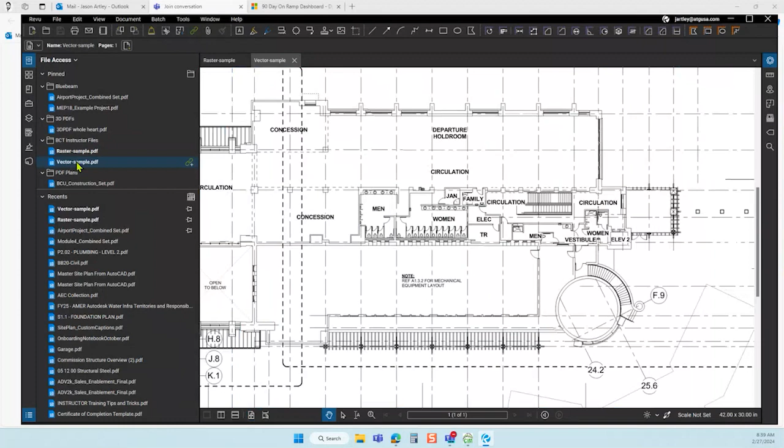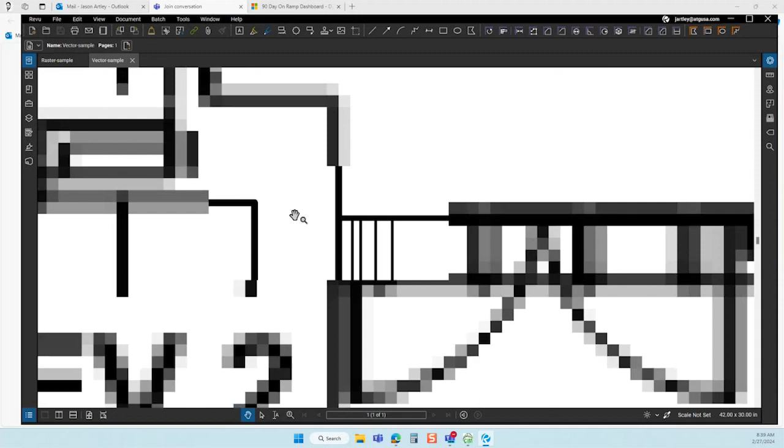When we're talking about PDFs, we're always going to be talking about raster versus vector. This is a vector one. It came from a CAD program or Word, generated from a computer. So this is what we're talking about when we say agnostic, as long as it came from a computer with no scanner involved. As I zoom in, the lines are crisp. They get a little funky zooming in and out, but otherwise I can still measure, I can select things, I can be more accurate. The line work and the text look really good.

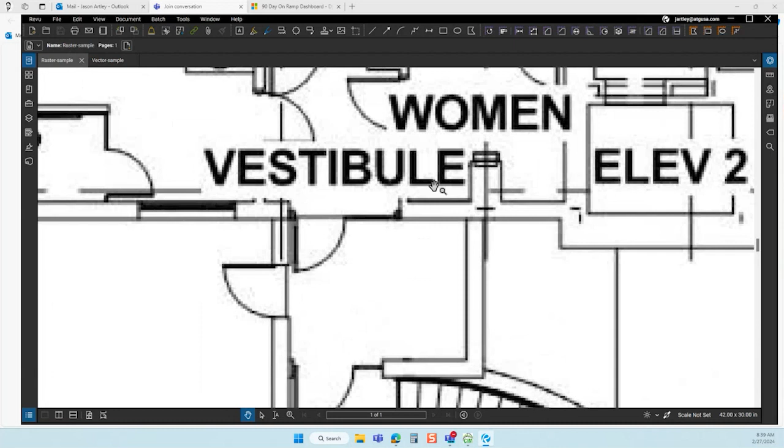Now in a raster sample, this is what we see a lot of still, where we've got those full-size pages that were printed out on paper and then run through the scanner. So it's the same file, but this is what's going to happen: you zoom in, and the letter just gets more pixelated and gross because you can only do so much. Even if you scan it at the highest setting, you're still going to have these digital remnants. A lot of folks have moved on from these, but David, you said you're still working with rasters quite a bit.

Yeah, some of the designers seem to, I guess, not trust us. Either that, or it's just the way they do their files. They will scan something or plot something and then scan it. The challenge with that is there's nothing there, no content for us to work with, and that can be very frustrating.

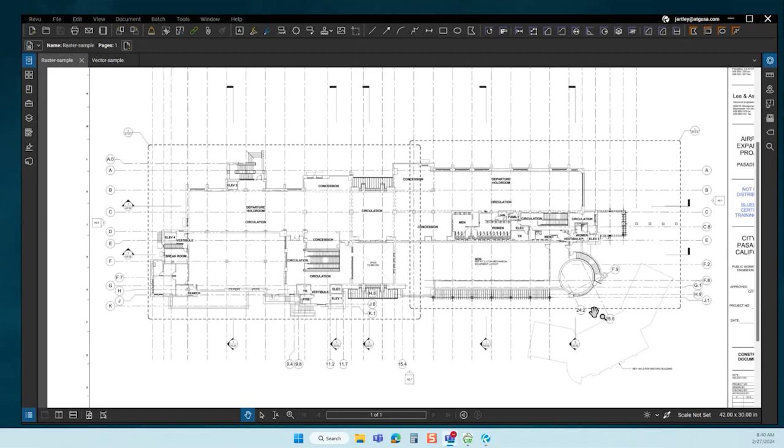Absolutely. Ray put in the chat, flashback to AutoCAD raster design, and it gives you the heebie-jeebies if anybody's played with that. Yeah, so you can still do stuff with these raster files, but let's talk about how we got here.

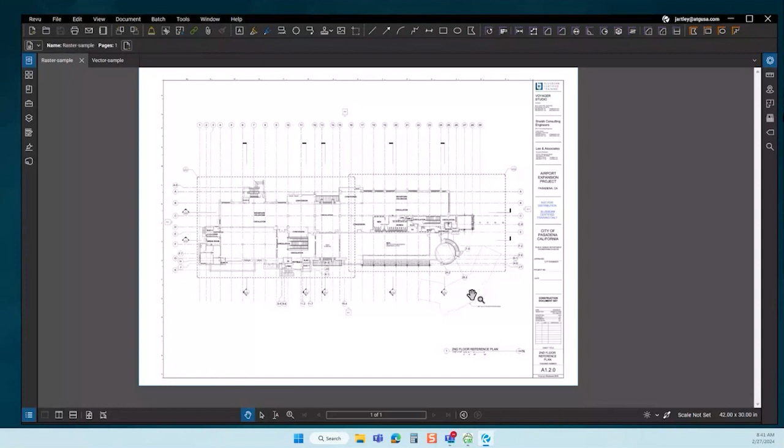This is assuming that you came from paper. So what does that mean? You printed it, probably had an engineer or architect sign it, and then they scan it, that way they lock it, as David said. They're trying to protect that information versus a PDF, because in a PDF we can sort of go and wreak havoc however we like with these tools. If I wanted to go in and remove something, I have that capability to take that out, or make a change to it.

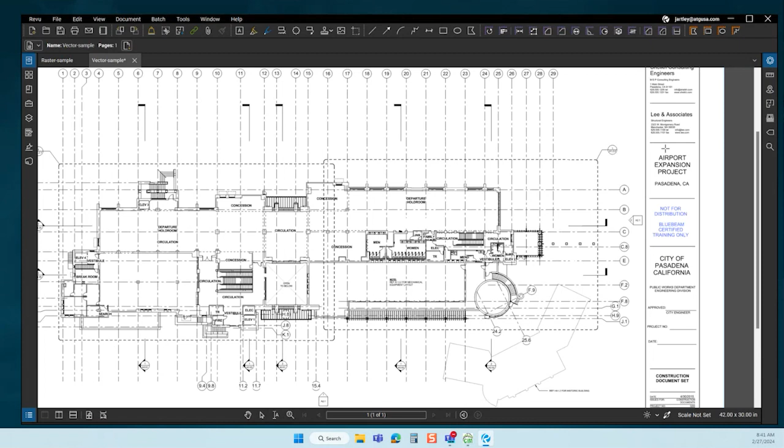This one wasn't signed, we'll talk about that too. If it was signed, sometimes you can't do that, and sometimes you can, depending on your settings. Michael and I had an episode a month ago or so on digital signatures versus digital certification, so go check that one out to see what changes were allowed and not allowed.

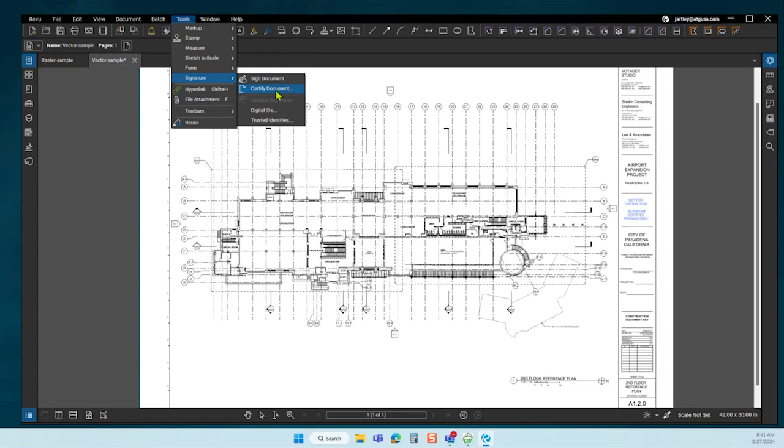Overall, and this is probably a question for everybody in the chat, how often do you still deal with paper and scanned raster PDFs?

Yeah Doug, what is this, 2010? You'd be surprised.

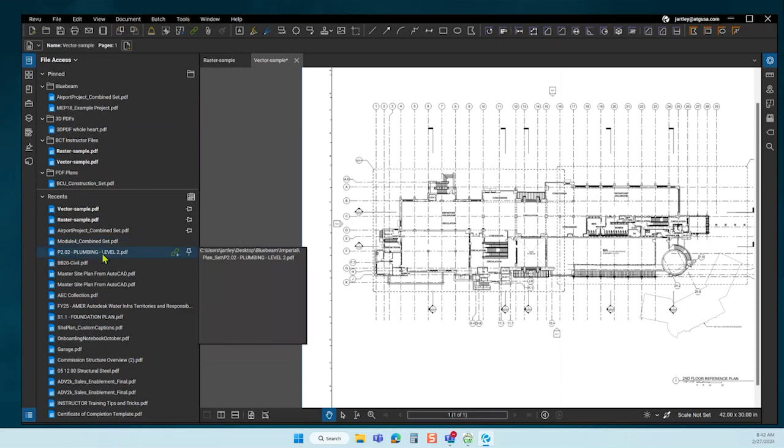I understand people's concerns about proprietary information and people changing things. At the same time, you're putting all this effort into producing a digital document, and you're basically making a photocopy of it on a really bad machine. You take all that functionality out of it, makes it not useless, but you're taking something that is a beautiful work of art with your line work and turning it into just a smear on a piece of electronic paper. In some cases, even old blueprints look better, you know? Exactly.

So yesterday when I was starting to dig through some files looking for an example to show, I found this one. I don't remember where I got it, I'm guessing it came from an old client file, so I erased the title block. But this is an old vector PDF, and what I thought was interesting about it was it's not half bad.

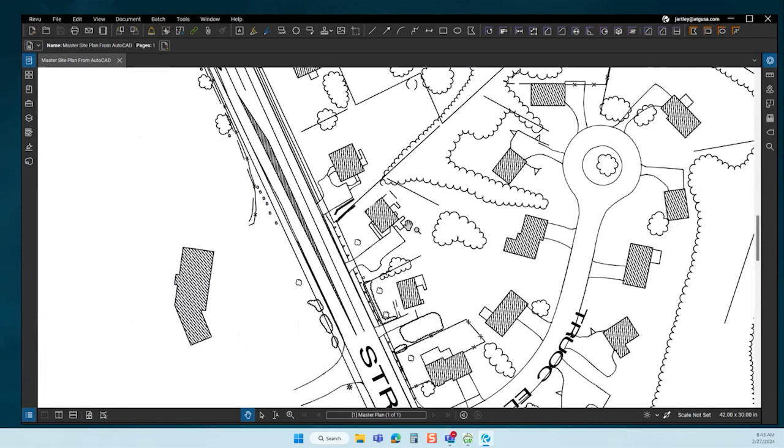I mean, obviously, that font is a sin, so we know it came from AutoCAD. But also, it came from 2004. So this file just had its 20th birthday, and it's still usable, right?

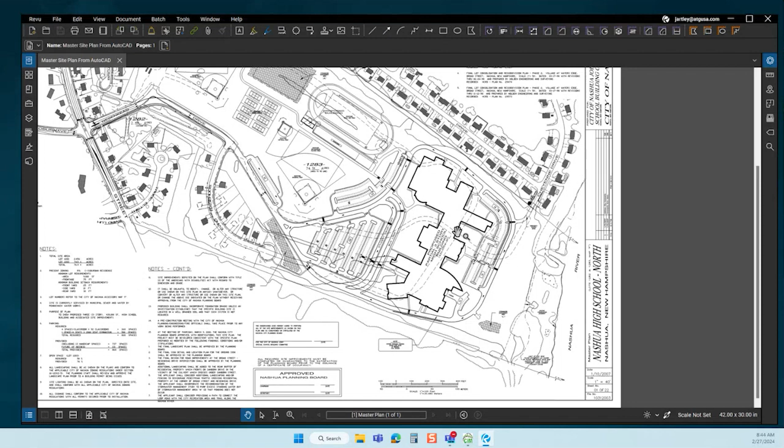So this is where this conversation came from. How are we going to make sure that the files we're producing today are still worthwhile 20 years from now, because there are as-builts, there are things we're going to have to go find. We're going to have a bigger digital repository of stuff on all these projects. We're not limited by file cabinet size or flat file size, we can store everything anywhere. So how do we make sure those files are worthwhile?

What I thought was interesting about this particular one, again, for being a 20-year-old PDF, is that it has drawing layers in it. These came over from AutoCAD, not a very good CAD standard in my opinion. There's a sports layer, but it has layers all the same.

So we're going to go through, I'm going to pull up AutoCAD or Civil 3D, and we're going to print to show you how to get those layers embedded in the PDF. But David, you were talking about stuff that you do with layers and stuff that you appreciate with layers as an estimator.

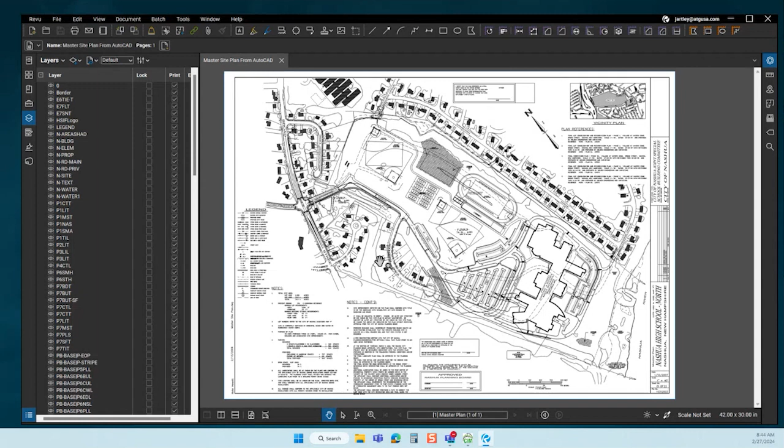Yeah, and I did open up one here, and this is one of the raster images. So if you happen to recognize the name of the contractor or the designer, I know at least there's one person that indicated that they're local here. Let me see if I can share this up here. This one has no layers, and I have to apologize here.

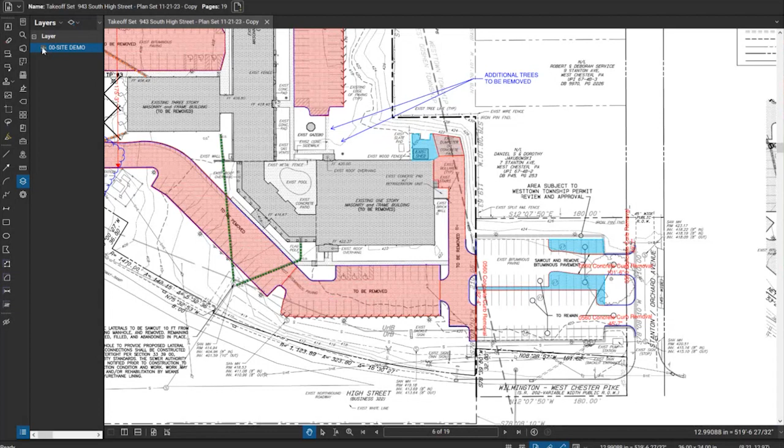I do have my layers on here where I've created some tools or using my tools, but I can't turn anything off here. If I wanted to use a dynamic fill in here, it won't see the lines anyway. But a neat trick with dynamic fill is if you have layers, you can actually turn off the hashing, turn off the line striping, turn off the contours, and do a dynamic fill through the parking lot just along the curb line. If you don't have the layers, you can't do that.

So it makes it really easy for people downstream to turn on and off layers. However, the argument against that is that you can turn off layers and reprint it. You can turn off layers, and what you're getting is not necessarily the signed or certified version of what was released, but an estimator...

At the same time, Jason, our customers that we have to sign a release for it will allow us to have the Autodesk files or the CAD files, and we can go in and do all that same stuff. Now we do have to sign a release that says they're not liable if we don't see all the information. Why couldn't we do something similar with the PDFs? And at the end of the day, we still have the obligation to produce the right product.

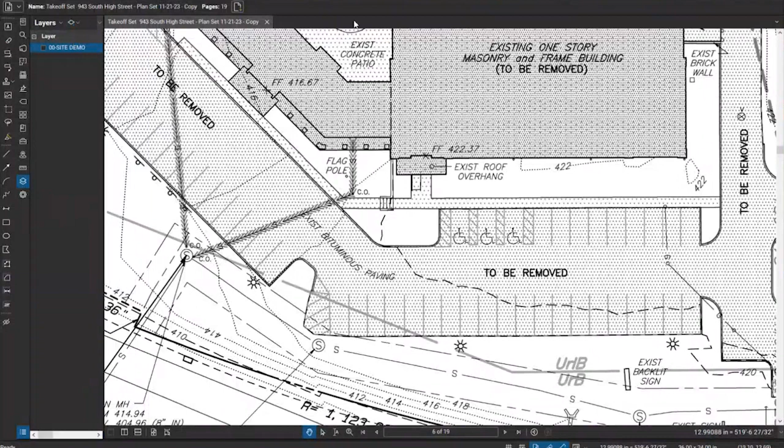Now, yesterday I was helping one of our sales reps. We're an Autodesk Platinum partner, but we come up against Bentley all the time, in a civil DOT fashion, because some states require MicroStation, Bentley, Open Roads, whatever, versus Civil 3D. And this came up with Pennsylvania, actually, because PennDOT.

Yep. On their website, they said they have... I forgot the terminology, it was actually pretty cool. By 2025, all civil drawings are going to be going off of the model, not necessarily the PDF or the sheets anymore. So the modeling aspect, the BIM, especially if you want to call it BIM for civil, is still lagging behind across the industry. But we're a year away from PennDOT requiring a model that you're going to be able to pull off of, which is wild, absolutely wild.

I think a lot of it comes down to clients needing to start requesting it and writing it into their design agreements that this is a deliverable.

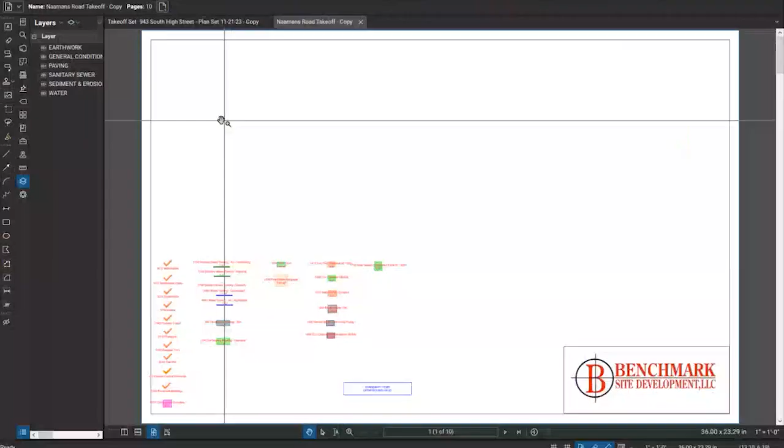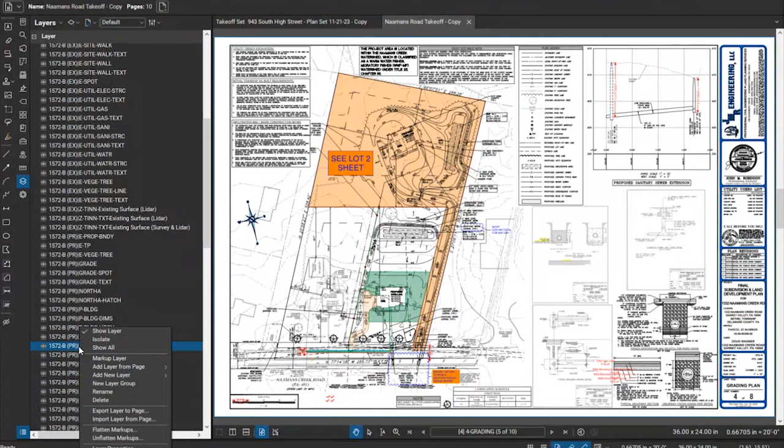I talked with a client last week, and I brought another one up here that I'll show. I went from the previous project onto this one, and this project has layers assigned to it. A lot of times I'll come in here and edit them, or edit my contours. I'm not very good about my layers because I don't have everything on its own layer. But if I wanted to isolate the driveway here, this client's designer has provided a product that is so much more useful to me.

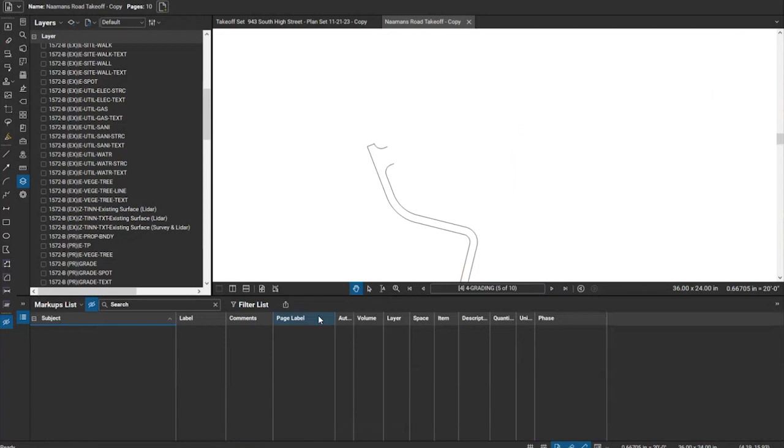Because I can just take and pour right through that and use that dynamic fill to get the area of that driveway. Without having those layers established, it takes that much more effort. And it's not just review either.

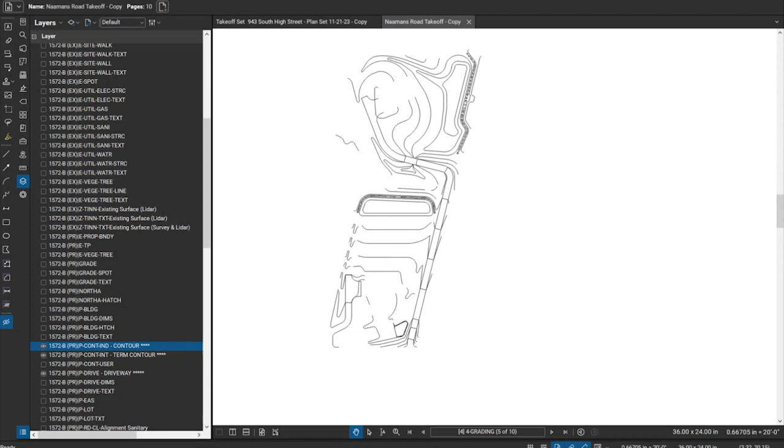We use a software through a sub-consultant named AGTEK for dirt work and dirt work calculations. When I showed him this first set we were looking at, it took him hours to go through and digitize the existing contours and then digitize the proposed contours, because it's a flat drawing. There's no detail there.

So anyway, I put myself into the light beam there again. Sorry about that. No, but the model-based thing.

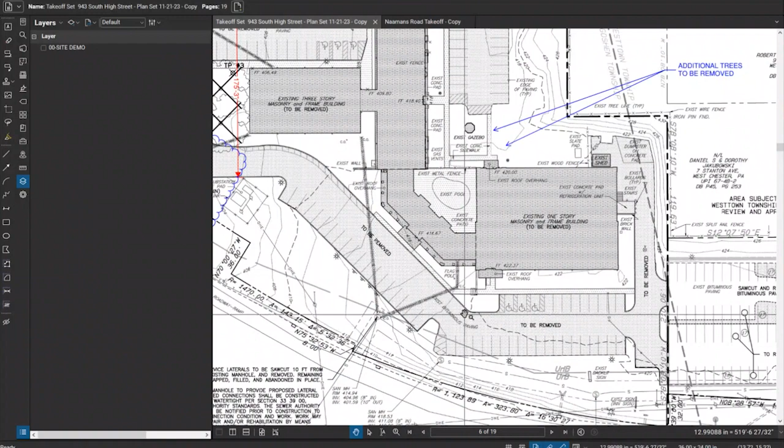So we're talking in the chat about, if you have that model, how do you review it? 3D PDFs are pretty good, but you can't measure from them, and I want to be able to measure. Autodesk Construction Cloud does really well at viewing those models, and I think we're going to see more resources that allow that functionality as we go.

But overall, this model stuff is big. Wisconsin DOT, Pennsylvania DOT, California, Florida — it's going to be more of a civil thing we have to deal with, because civil is always a few years behind architectural when it comes to modeling and technology. It's going to be interesting to see where it goes.

Tina asked an interesting question here about layers, and I'm not a Revit guy. I can work myself around in TrueView, though I'm not skilled in it by any means. Same thing with AutoCAD — I can't speak to what it takes to produce a PDF the way I'd like to have it. I just know it can be done, so I've got to find the right people.

I wasn't familiar with what Tina mentioned about Revit not doing layers. Maybe that's something I've learned here today. So thank you, Tina.

Yeah, I think Ray, I might have to tag you in here, buddy. I'm not a Revit user either, but AutoCAD can do layers beautifully. I'm going to pull up a drawing — trying to find a demo data set here — and I'll show you that workflow.

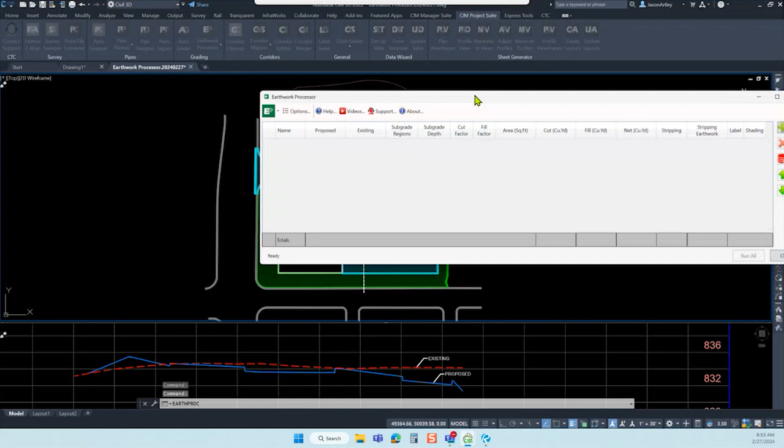It's been a hot minute since I've been in Civil 3D, so I'm going to sidetrack and try a quick demo from Earthwork Processor since we were talking about processing earthwork. David's doing it from a PDF that's getting digitized, or using AGTEK. I'm going to use an add-on for Civil 3D and create a couple quick examples, just so I can have an exhibit to print.

I can do this in my sleep, so I'm just going to do this pretty quick. We're just going to leave everything basically default, just to get some data in here.

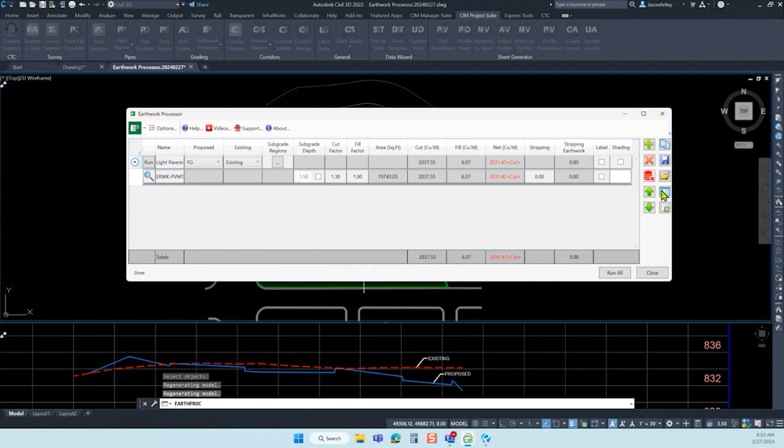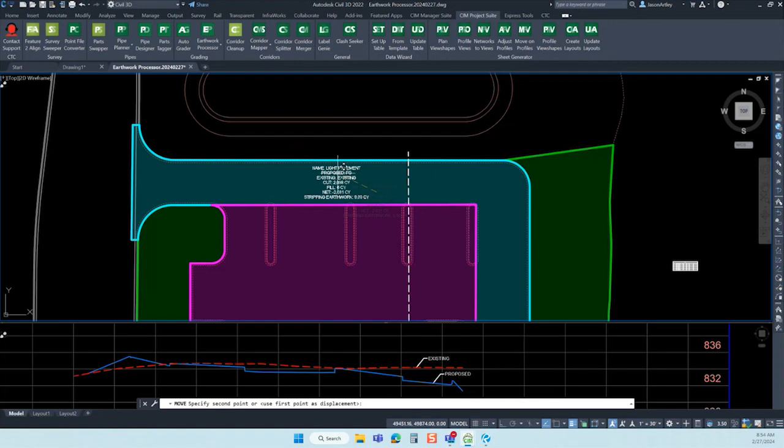While you're working through that, Jason, the other thing as far as I'm concerned is that a lot of these things, if the standard is set and there's an expectation, it's a huge time savings for downstream folks. If the PDF you receive has been scaled, you don't have to scale it again. If it has layers, you don't have to establish those layers again. One designer puts in an extra hour or just builds the habits so that it becomes their standard, and everybody downstream reaps the benefit. I'm not a lean expert, but I'm sure folks would highlight that as a way to make downstream use more efficient by removing that repetitiveness.

Right now, if I get a drawing and send it to Vince to look at a certain portion of it, he has to go through and set all the scales or spaces and things like that. Then I'm doing it too. Now both of us have done it, and all that does is make everybody's costs go up. But if Doug had sent us that document already with the scale set and the layers and everything usable, we wouldn't have to repeat that effort.

Exactly. So let's talk about the scale, the layers, and bookmarks. So here I'm in Civil 3D, aka AutoCAD, right? AutoCAD is the same, Civil 3D is built on top of it. When you're printing from Civil 3D or AutoCAD, there are a number of different printers that come with it.

Obviously, if you've got Review installed, you have a Bluebeam PDF driver which works really well, but this one cannot do layers. It's frustrating, because our goal in this exercise is to get layers from AutoCAD and put them inside of Bluebeam. Instead, we're going to use DWG to PDF. This comes with Civil 3D, comes with AutoCAD, and has been the default for over 20 years.

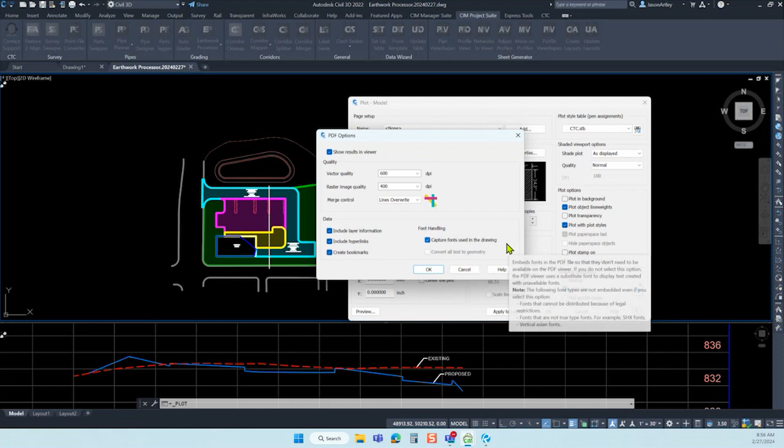Now on that note, just to get on a little bit of a rant - I know we talked about Simplex, the AutoCAD font. If your CAD standards are set up to use Windows TrueType fonts, the better off you're going to be in Review, because you can actually edit the text and read the text and all that other stuff. So this is going to capture the fonts, but hopefully they're just Windows ones.

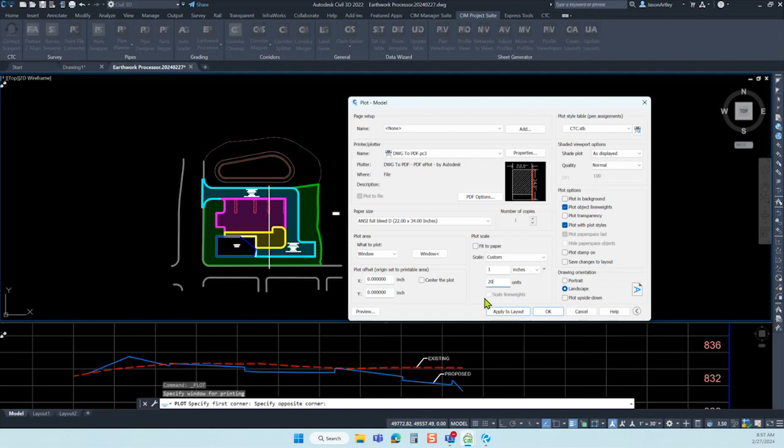So now I'm just going to go over here - I'm going to give some people the heebie-jeebies for doing this. We're just going to call that 20 scale. And oops, not that one. And we'll center that. Whoa, that looks bad, that's really weird. That shouldn't happen with those hatches. I've never tried printing this file, obviously. There we go.

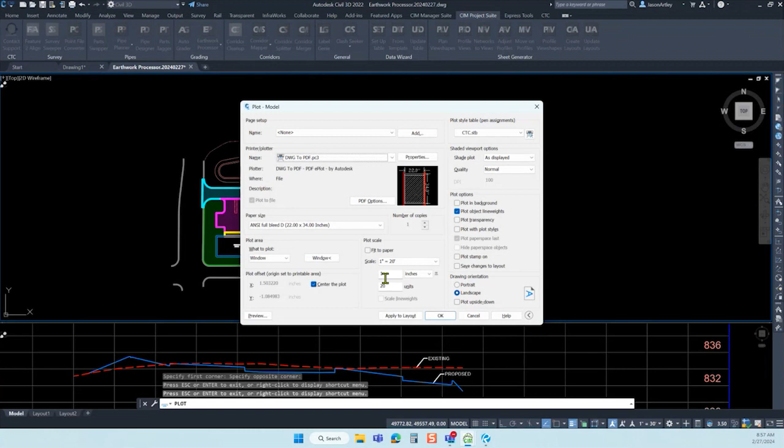So let's just roll with that. It's 20 scale, it should have layer information, and it's going to make a PDF to the desktop.

Yeah Jason, Josh has got a good point here about accuracy in what you're designing and what you're creating. Yeah, I started off in AutoCAD back in 1988, '89 in high school.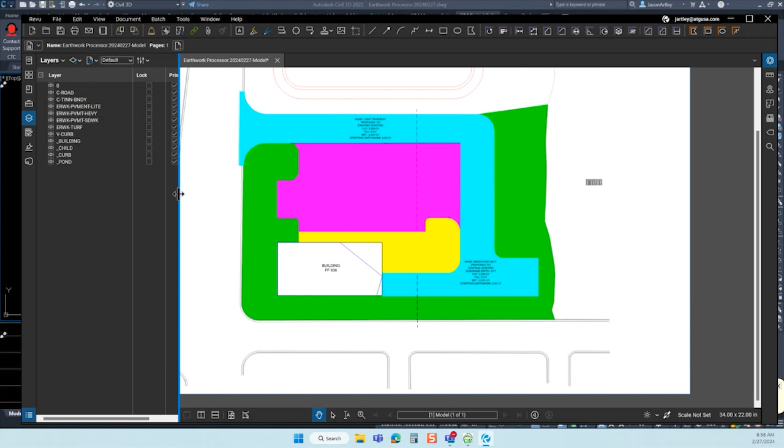Back when you actually had to have the 5 1/4 floppy disk to put in the machine to boot it up. I didn't know anything about scale, and I knew about as much as the teacher did that was trying to teach us. So I was just drawing lines, trying to draw a subdivision and a catch basin, and I thought I was really cool, but it should have been a crayon sketch. No, Doug, I'm not quite that old that we dealt with punch cards, but I do know what they are. It really comes down to what you're trying to do and putting some pride in your work.

And again, I am not a designer. You give me a blank sheet of paper, it's probably not going to be pretty. But at the same time, when I get a piece of work and I can see that someone has put the time into making the lines connect, and setting the scales, and those kinds of things, that's the pride of ownership in your product, that I don't know if people are just rushed or they don't feel it's necessary. We need to get the word out there that it really does make a difference.

Absolutely. And it's not something new, right? CAD standards have been out since '82 when AutoCAD came out. So it's just been one of those things that is hard to adjust to.

And I thought it was funny, if anybody's heard of AUGI, the Autodesk User Group International, it was a magazine, or it still is a magazine, but it's been out for a number of years. AUGI has since stopped using Autodesk as much, so now there is Bluebeam content, BricsCAD content, other content in there. But in the latest issue, and I'll put it up on our LinkedIn chat, there is an article about how saving or spending an hour now is going to save hundreds of hours down the road, right? And it's the same thing that David and I were talking about yesterday. If we spend an extra half hour on our project, think about all the time it's going to save all the way down the line. I thought that was a timely thing for AUGI to pop up.

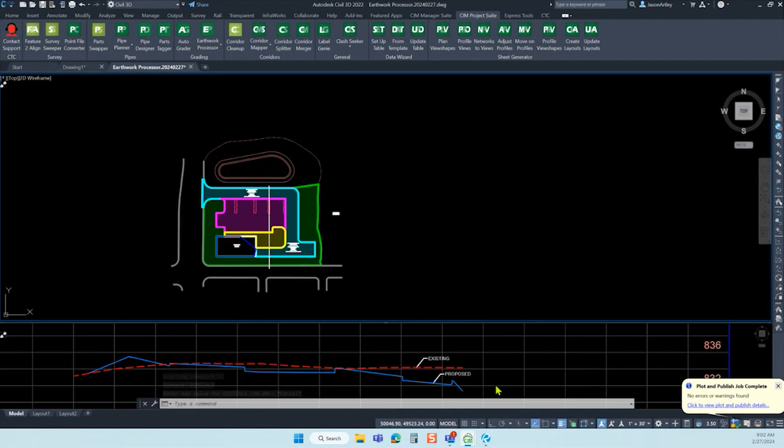So I didn't talk my way through it, but notice when I brought this PDF in, it wasn't automatically set to scale, right? It wasn't at that 20 scale that I had printed from. Even if this drawing was set to that, it's not going to come over. I mean, this was already set to 30. If that were a setting that would migrate to PDF, it should have come in at 30 scale. It didn't. But since I know I printed it at 20, I went and set it at 20 in Revu. Now that's a step I can take, who's going to save somebody a ton of time, because this particular exhibit doesn't have a scale bar on it. It doesn't have anything you can pull off of, no known measurement to calibrate to. But since I know it's 20 scale, I can go and save that time for somebody down the line.

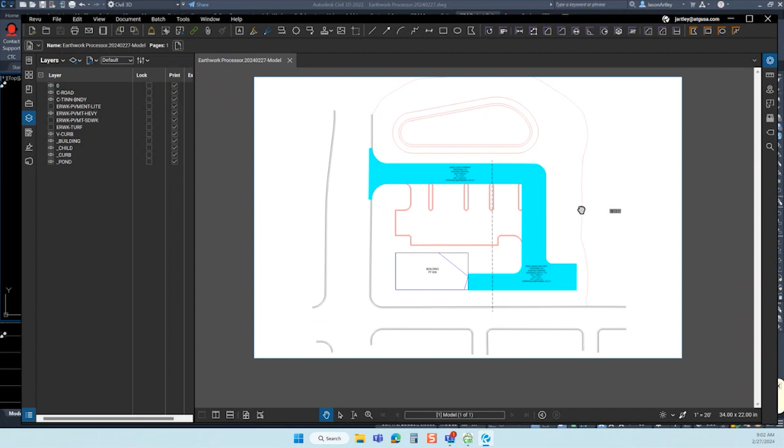It is a pretty ugly exhibit, but it is what it is. All right, what else did we want to talk about, my friend?

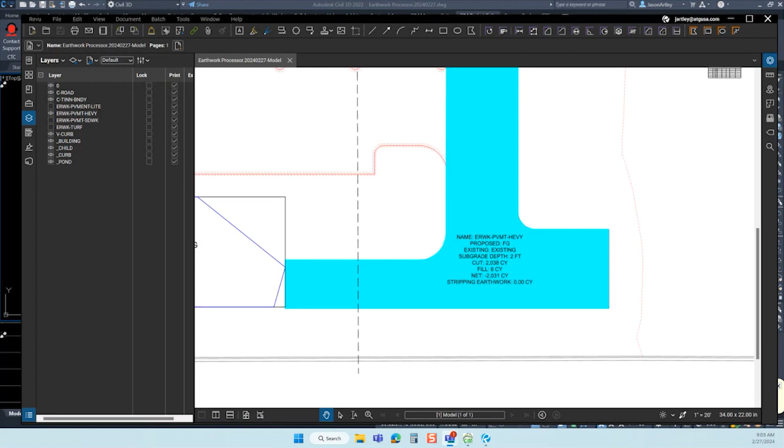Jason, you seem to be muted right at the moment. Because I sneezed and I forgot to unmute myself.

Thank you. Yeah, there's that artistic license, right? I have a blank sheet of paper, a blank screen of CAD. I can do whatever I want. However, if I'm doing what I like, doesn't mean it's what you like, or what anybody else likes.

That's why there is in the U.S. a national CAD standard that we're talking about. Getting everybody to comply with it is impossible, right? And this is part of that—this 4-digit or 4-character dash 4-character blah blah blah.

That's a national CAD standard. I do have the actual national CAD standard on this computer somewhere. It's 900 pages long, right? So who's really going to go look through that to find everything that they need? It's ridiculous. So getting everybody to comply is just something that most folks don't have the time for.

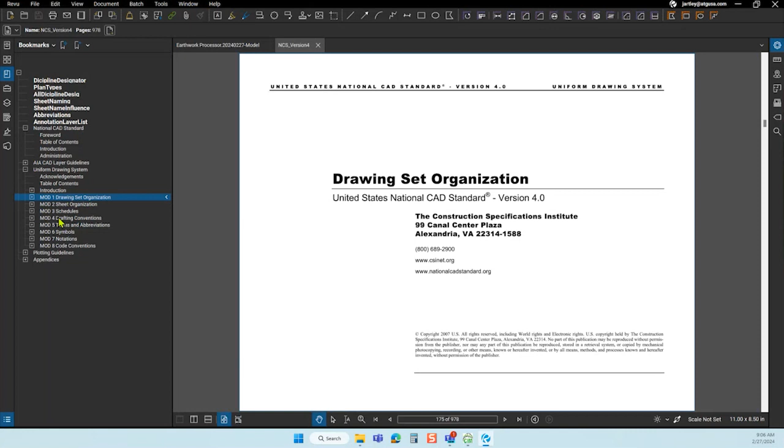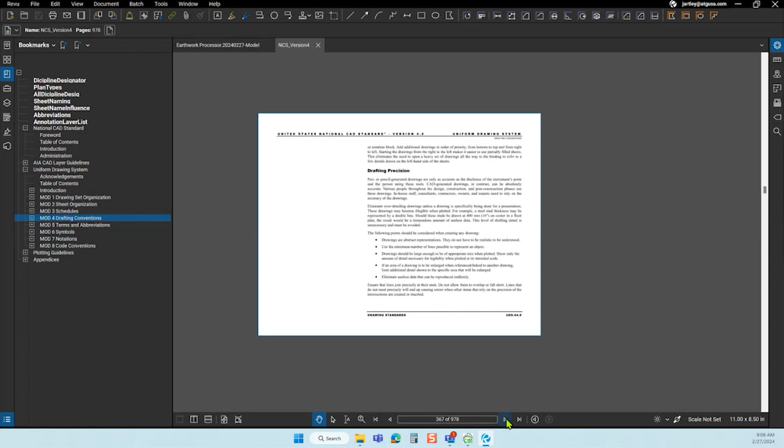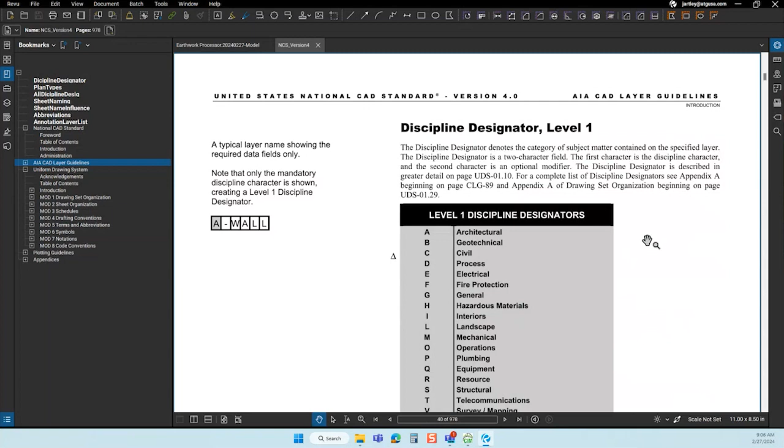We actually talked about that. I think it was Adam Bauer who had posted a question asking about how to unlock an AutoCAD or a PDF file. One of my suggestions to him was ask them to send you an unlocked file. And he reached out to the designer, and they provided an unlocked file. A lot of it just comes down to asking for what you need.

Every once in a while, you might just get it. You're going to get some people that are going to say, no, no, no, this is my work, I can't send you something that's got my stamp on it. And I appreciate that—I understand their concerns.

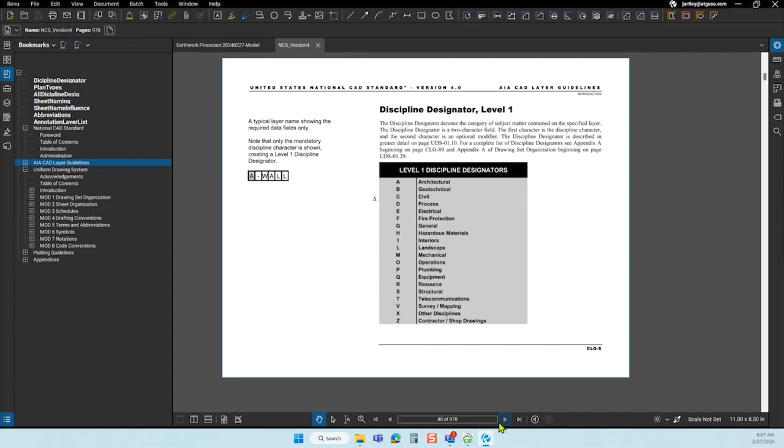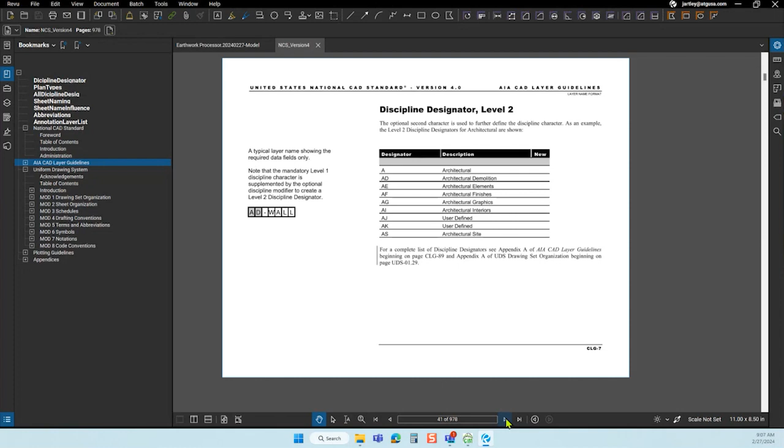But we're in 2024. This electronic stuff is the way to go. I mean, that earlier PDF that I showed is over 20 years old. This isn't anything new. And the rapid change that we're seeing in the industry, from CAD to BIM to 3D PDFs to AI—all this stuff is happening really rapidly, but we still never adjusted to those things from 20 plus years ago. It's going to be a world of hurt for some folks.

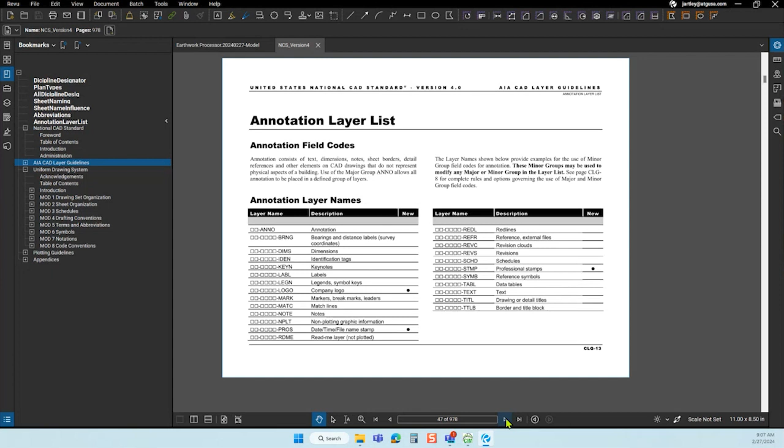But even this CAD standard that you opened up, look over to the side there—it has bookmarks. Now, hopefully they're right and not just dead marks there. But somebody put the time into establishing those bookmarks, or maybe it was auto-generated out of the software when it was printed to a PDF. But that's awesome. That's what we need.

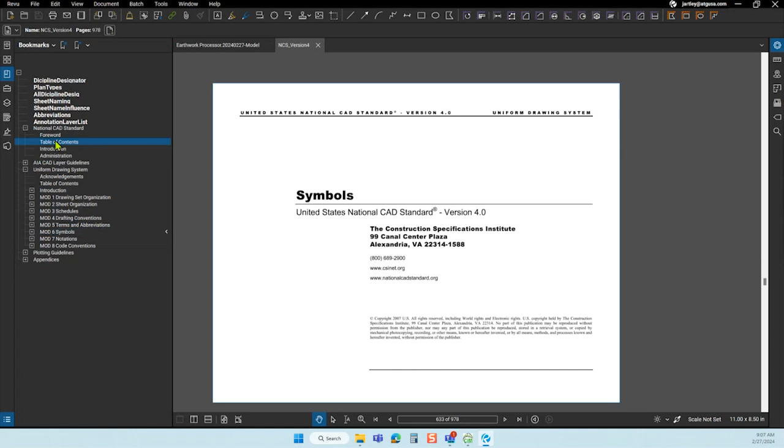Yeah, and this is from 2007, right? So again, adding bookmarks to PDFs is nothing new. It's just, oh, I didn't know it was there. And these are little things that you can do to make everybody's life easier.

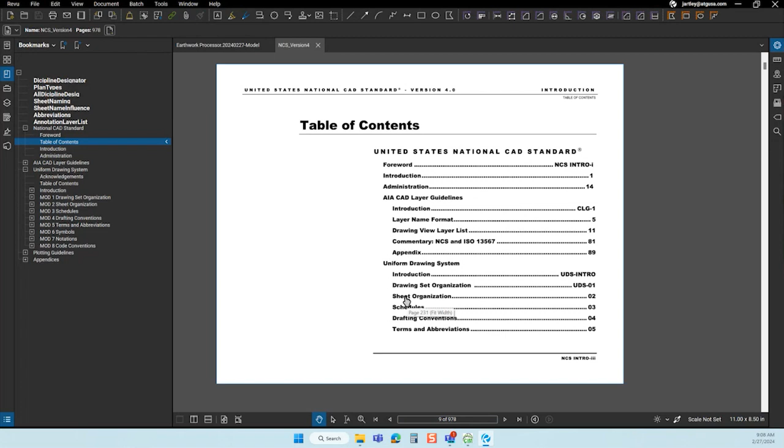At least it's not as long as the tax code—I don't know, 978 pages is pretty ridiculous. But there's hyperlinks in here that work really well too, so this is a good example. If you were to buy this, I think the current standard is like version 7, it's like $1,000. But if you know how to Google, you can find this one.

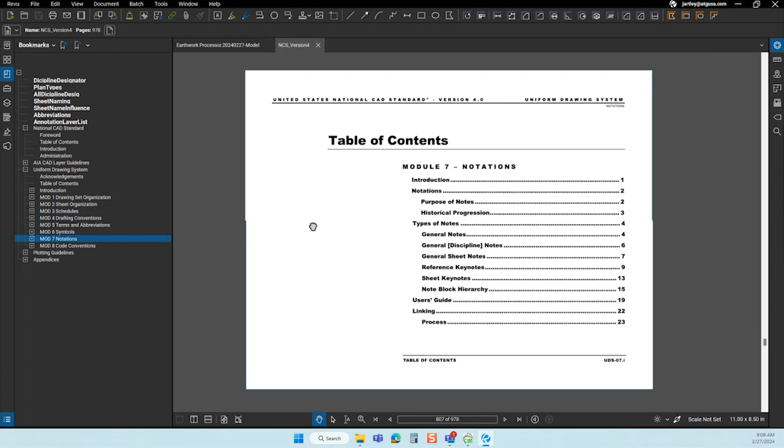So yeah, PDFs, bookmarks, hyperlinks, layers, scale. And now obviously this isn't a design document, so there wouldn't be a scale. What other things would we want to think about when it comes to making sure this file is understandable by somebody who's going to open this in 25 years?

Naming conventions, maybe? NCS—if you don't know what that is, that could be a problem. Do we like big, long words in our file names? Do we like abbreviations? Do we like spaces? Do we like dashes? Do we like periods or underscores? Where are you guys at with all that?

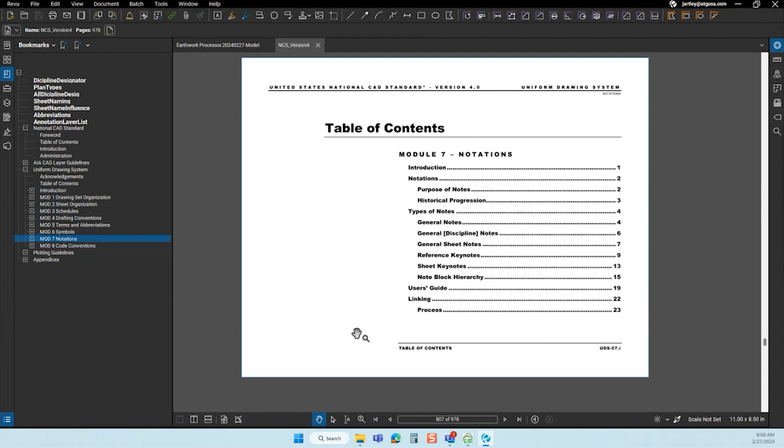And some of that might be better answered by some of our more tech folks than myself. I'm a user, not someone who knows what pipes do versus what a dash does as far as searchability and stuff. I'm not very good at that. I'm still trying to understand why I can't just put spaces in file names and I need to put underscores in, because no one's ever really explained that to me.

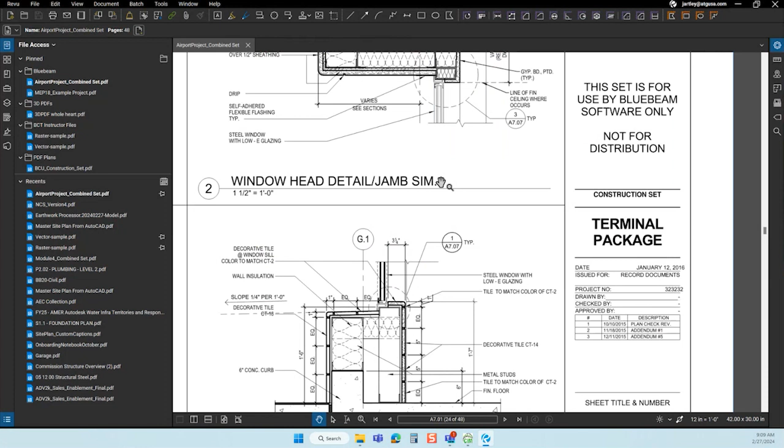Okay, so in Windows, you have a 256 character limit on how long a file path can be, and a space is actually registered as %20. So a space takes up 3 characters, not just 1. So there's one reason, there you go.

I learned something today, and I know Vince had some trouble with that using cloud storage, where the file names were so long that they got up over that, I'm guessing over that 256 character limit, and it would crash the system. He wasn't able to use those online file shares because the paths were so long. So okay, well there you go. I learned something that I don't know.

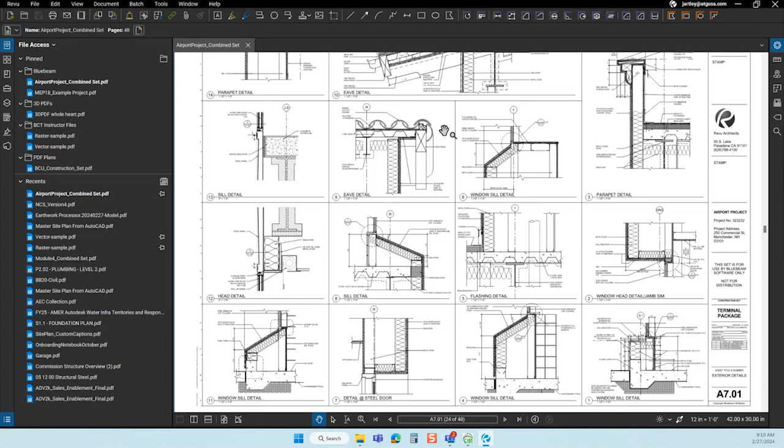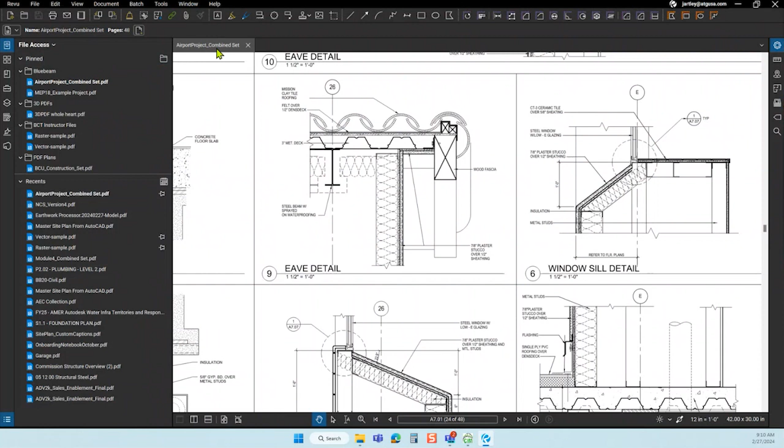I will start using underscores. I don't know if that's still the case, I know that was earlier in Windows 95, 98, all that other stuff. But that's one reason I always use underscores, because I also have an Esri background for GIS, and GIS does not like dashes. So when I'm dealing with CAD files or anything else I might open up in GIS, it doesn't like dashes. So I use camel case and underscores. That's usually how I can tell it's a file that I had named, even though there's a space in here because I was lazy yesterday.

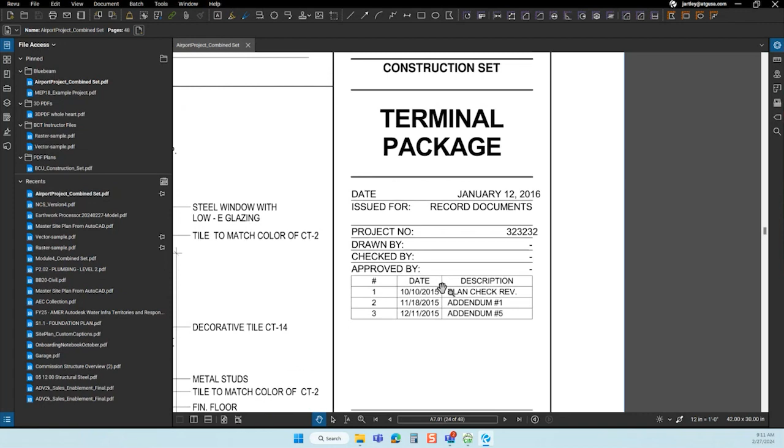But the reason I opened up this one is because somebody mentioned that revs and dates are most important. So this is a construction set that has the rev dates on here with the addendums. Pretty important stuff, I suppose.

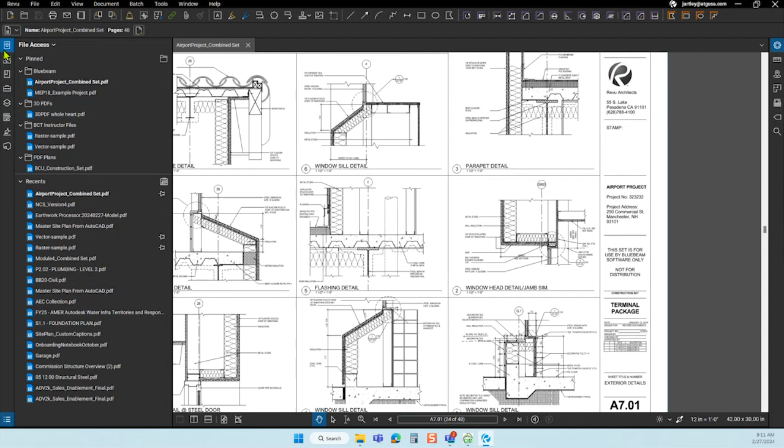Yeah, that's important. And the other one, this is going to be really nitpicky at this point: don't move stuff around on the drawings from version to version or from revision to revision. I got a plan set last week that was Rev 15, and we bid off of Rev 9. I went through and was using a batch overlay. Worked great on some pages, and then I had some pages where instead of things lining up one over the top, they were offset by about half an inch.

And it just takes that functionality of the overlay and throws it out the window. Now I can go back and do that sheet individually and pick 3 points and such, but that slight movement is enough to make your eyes go crazy when you do that red and green overlay.

The other thing they did is they would move a detail from one page to another page, or shift something around in a sequence. And the sequence looks completely different, but all they did was change 3 words, and it changed a return and pushed everything else out of whack, and it just makes that reviewing process take a lot longer.

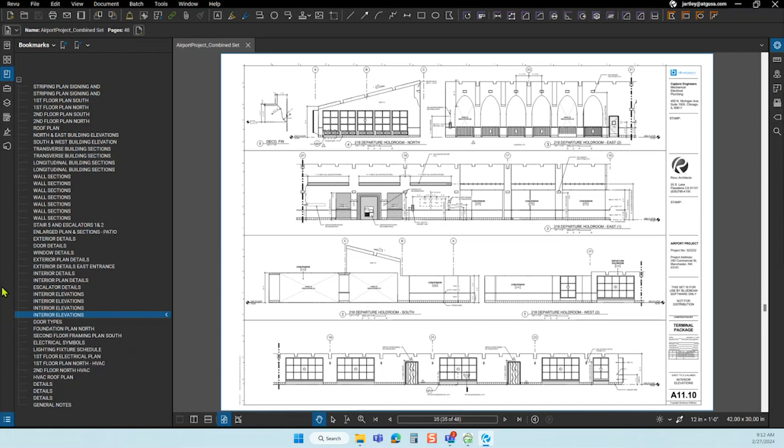So let's talk about revisions. This one has the revs put into the title block stamp. But here in Studio, we do have revision history available to us in Studio projects. Is this something that you guys are using out there to review your different revisions? Or how are you keeping track of your old revisions, I should say?

So for myself in the civil space, I'm not using Studio at all. I see you folks use it, and I hear about other people using it, but our estimating department is 2 people, and we work on our own projects. We don't share, so we honestly don't get into it. Everything I do, we have saved copies, Rev 9, Rev 10, Rev 15, separate PDFs. We're relatively low tech when it comes to that.

Doug, I forgot that you had shared your XCon stuff. So look at that. Here's what we're talking about.

You have the ability in Studio projects to go through and make changes, save it, and have those revision histories right here. So if you needed to go and say, hey, what was done in version 1 versus version 3, you can go ahead and do that, and you can open it to see the difference.

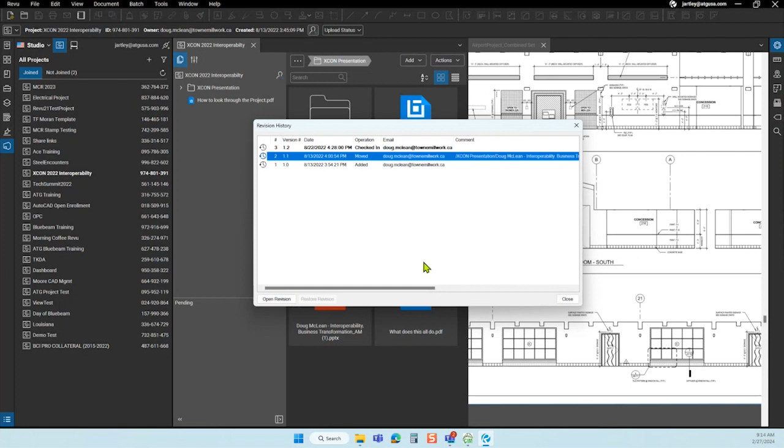We talked earlier about Autodesk Construction Cloud and how Trimble Business Center and some of these other new platforms are allowing for those reviews. The revision history in Autodesk Construction Cloud is amazing too, because you can actually compare, and it will overlay automatically revision 1 and revision 16 and show you the differences.

Yeah, I do that, but it's a process. I go through and if I get a PDF that's 31 pages long, I split it all into individual sheets, then split the previous one into individual sheets, and use the batch tool to overlay them all, assuming they line up.

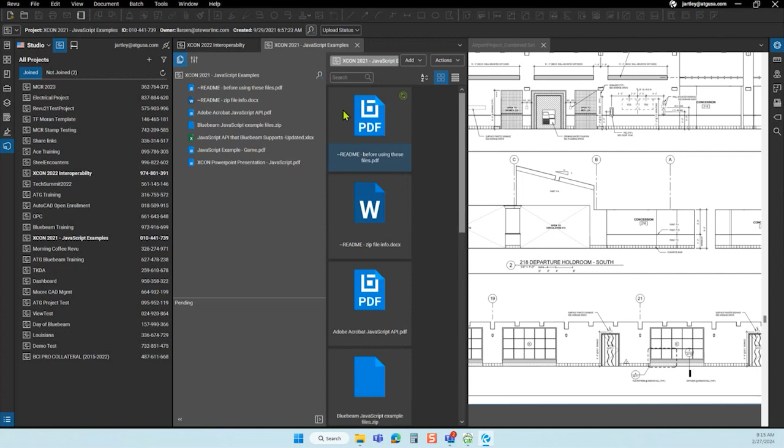I like it both ways. I like it when I get a set of files where it's 31 individual PDFs, and at the same time I like it when I get one big file. Ideally I'd like to have it both ways - the 31-page PDF and the individual sheets. It saves me that step. But having the pages named, the bookmarks set, and all that - if you're talking with a client, you can say, hey, open up the bookmarks, go to the grading plan. It just helps with that processing for everybody.

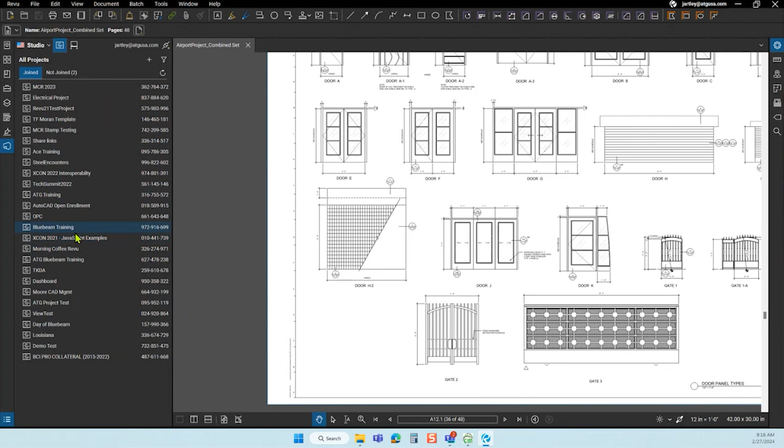So those revisions, let's go back to Doug's one right here. When you have a file in Bluebeam Studio projects, you can right click and there's a revision history, so that's where you can go in and see what's different between them. You can open up the old one.

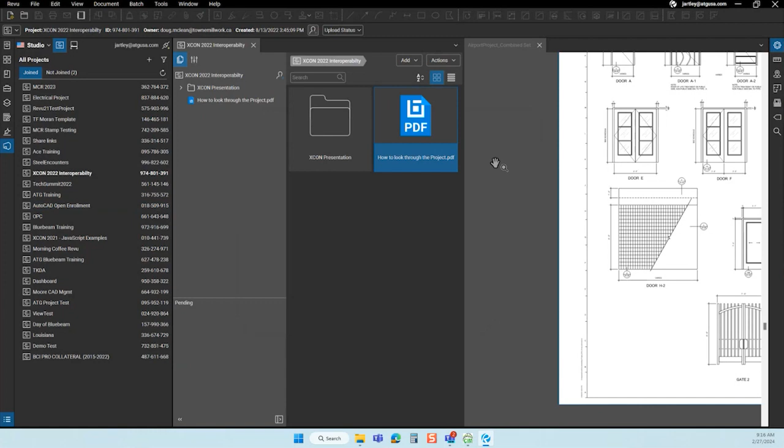I was just answering a question in the chat. All right, so we got about 14 minutes left. We talked about layers, we talked about bookmarks, we talked about scale, we talked about links a little bit. What else do we need to think about?

Can I throw my number 1 out if I had my top 10 slide done? I'm gonna turn that into a LinkedIn post later, so I invite everybody to come comment on that and let me know what you think. My number 1 complaint about PDFs I get from people is when they're locked. A locked PDF, and there's ways of getting around it, is just not a useful tool.

And again, I understand people's concerns about protecting their information and protecting their stamp and all. There's always going to be someone who's going to do something nefarious with something, and I hope I don't cross paths with those people. But to put all that effort into building that digital document and then throwing it away or locking it down is very frustrating.

I received some drawings from a particular designer - I don't have permission to show his stuff, so I'm not going to show it here today. He probably wouldn't be happy because he always makes sure things are locked and doesn't want them shared. Anytime I go in and try to set a scale on something, the whole screen goes blue, and I can't use that document to do my job, to do my takeoff, because I can't measure on it because he doesn't have the scale set.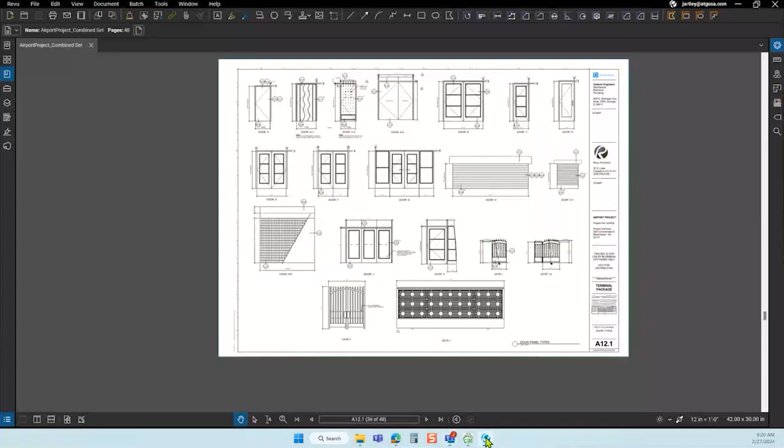Yeah, absolutely. And since we got a couple minutes here, let's go talk about flattening, right? So what that means is normally if we're doing stuff in Revu - now I'm just going to go to a different drawing because why not?

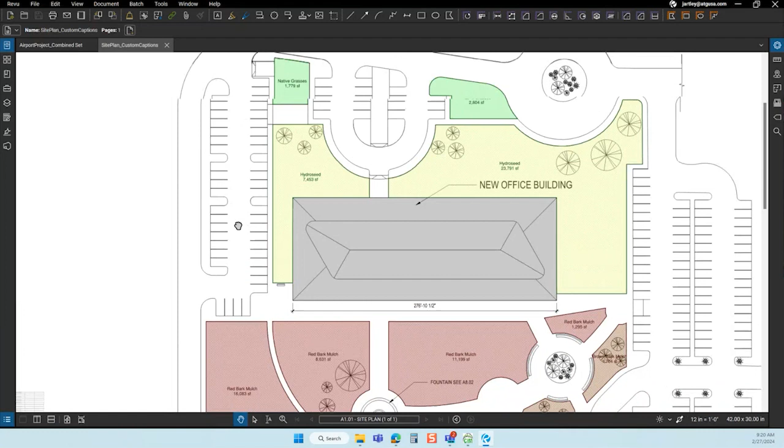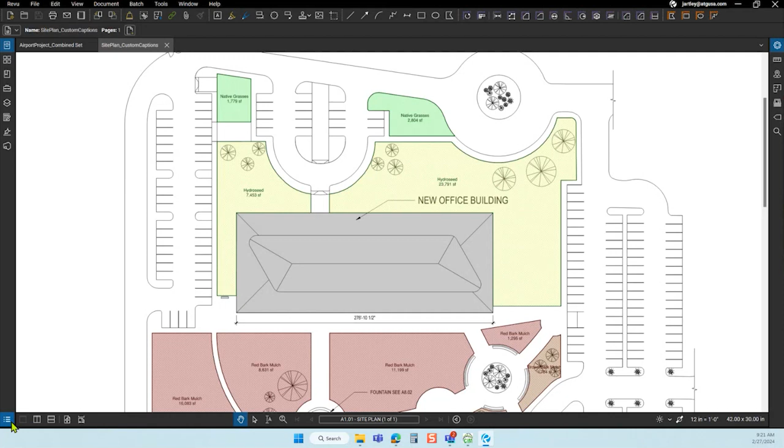I pulled this up last week. This one has markups in it. So if we're doing stuff in Revu, meaning we've added markups, measurements, done things, that's going to end up in our markups list. Meaning if I send this file as is to somebody, they'll be able to go in here and manipulate my areas, manipulate different things, assuming they have Revu, because it might look totally different in Nitro or Foxit or other programs. It could look funky and may or may not give you the ability to move things around. So we can tell it's not flattened because everything appears in the markups list.

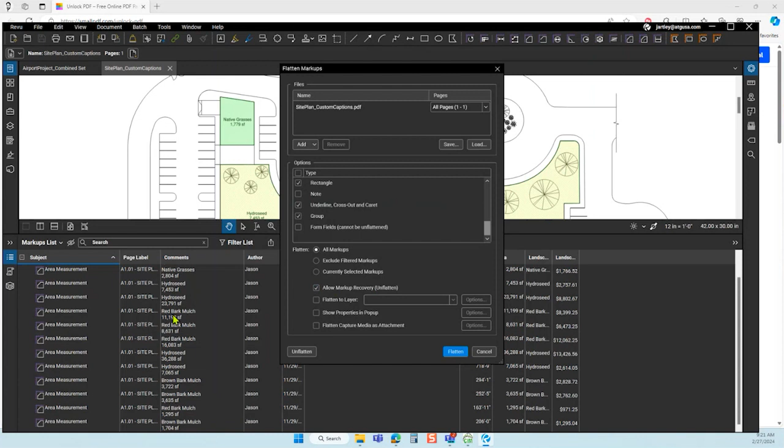If I go over here to document and go to flatten, or Control-Shift-M, it gives all sorts of options. Do I want to flatten my image, my stamps, my snapshots? I can say okay, what do I want - my rectangles, my notes, all my markups or just some? Do I want to allow unflattening? I do in this case. I'm going to go ahead and hit flatten. Watch what happens to the markups list - it empties out. Now I can't manipulate that same area anymore.

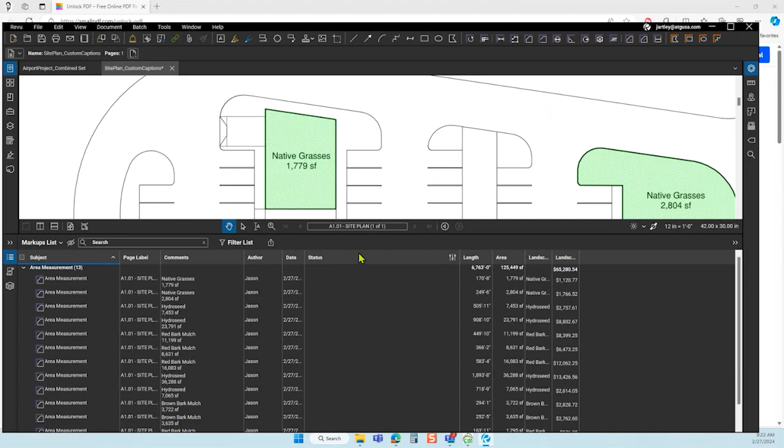Now this file is not locked, but I flattened the markups to the PDF. So someone can still get into that PDF and do things, but they can't manipulate what I did in Revu. It's almost like making a photocopy of it - you still see the markups, but you can't do anything with them. Exactly. So I went and unflattened it - now I got my markups list back, and I have all my comments. At this point, this file is not locked in any way.

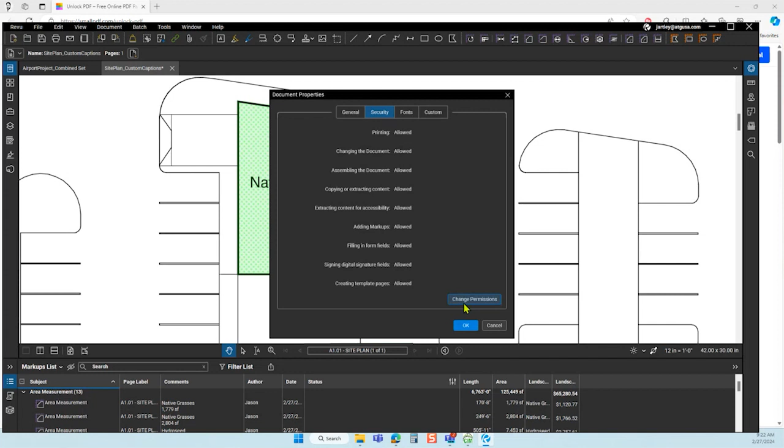I do have that ability to go here to security, and this is where I can have different lockings and change permissions, and you can do things this way.

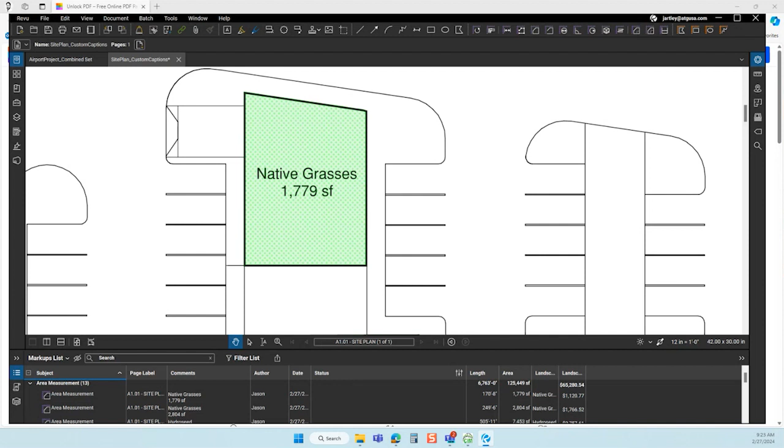Or you can do it through the certification. The other one I found this can be helpful for is if, for example, I'm doing an RFI and I want to mark something up, but I still want to be able to modify it later. A lot of times I'll flatten the PDF before I send it out. I may even leave it so that even the person receiving it can unflatten it. But what I find is it helps keep my client or my client's engineers from moving my markups and losing that frame of reference.

Absolutely. Okay, let me get caught up on the chat.

Smallpdf is like $100 a year. Oh, I didn't get that far. Okay, cool.